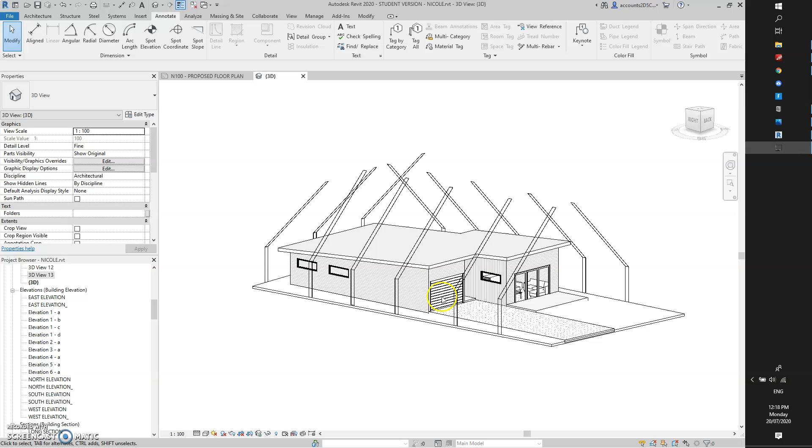Hey Nicole, look, I've just plotted the site, and these are the height to boundary markers which sit on the boundary. I've put a 600 eave on everything.

You could probably reduce it down to 400, but just to show you that we're actually clear all the way around. I've positioned the site as far back as I can.

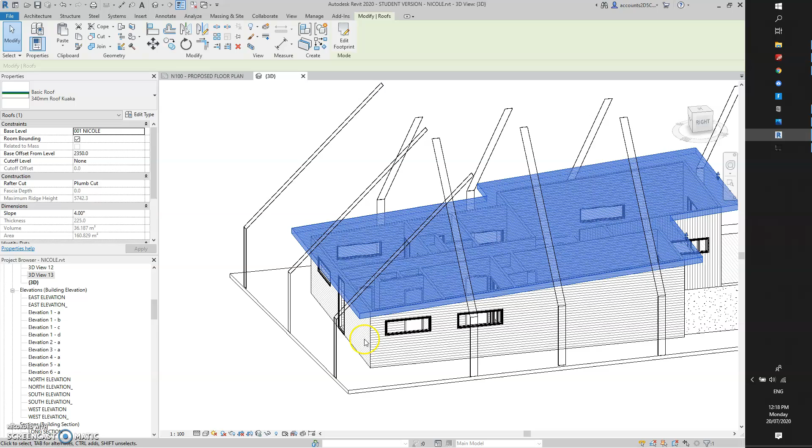I've put a sloped roof on it, so it's going from high to low, which I'll give you an indication of in a moment. I thought weatherboard everywhere, but I thought...

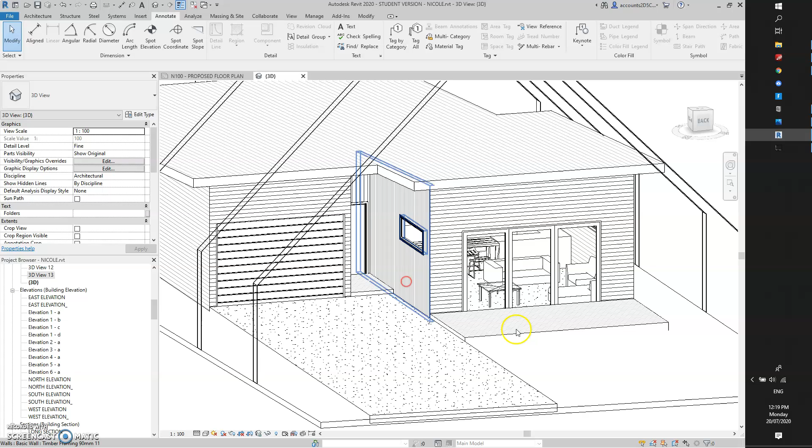What might be quite cool is if you did this entry wall in vertical, just to change it up a bit, maybe even that back wall vertical. It seems to be what a lot of developers are doing, just around that entry.

To keep costs down. Sort of folding doors - let me just correct that - bifold doors onto a deck area with some planting.

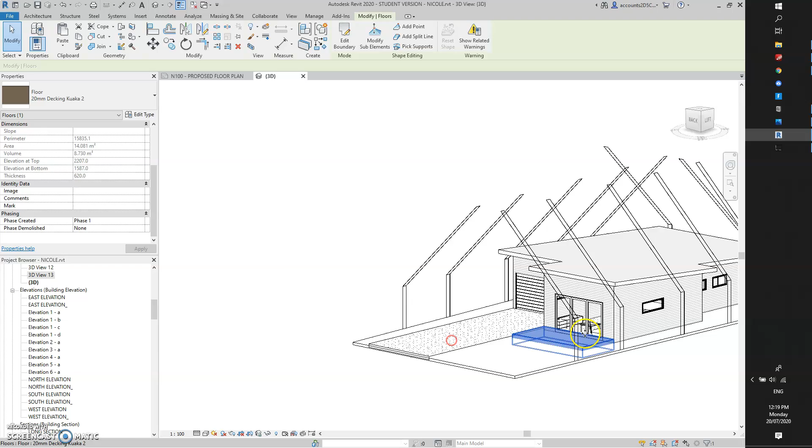Look, I've just chucked in some windows for now, just in terms of the spaces. A full-length ceiling to floor window in the hallway to let light in.

It is the south side, so this roof probably won't. What we may end up doing is from that wall there, sort of this is all sloping, but like I was saying before, this would all still be a truss roof, but flat on the inside.

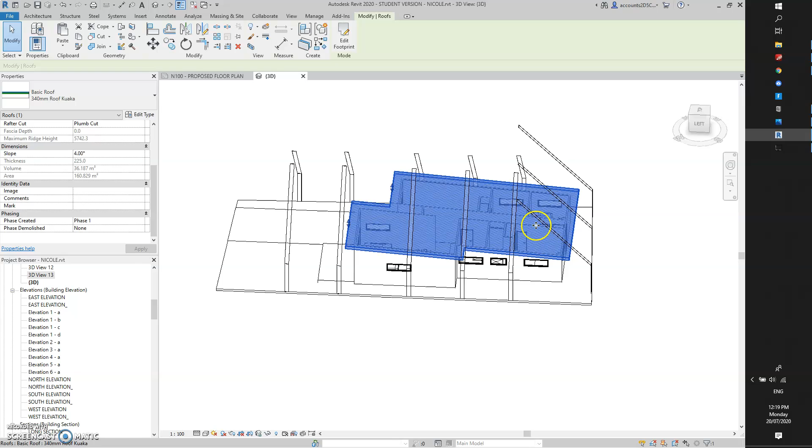So from a footprint side of things, I'll let you have a look at the plan, but basically, yeah, 104 squares is super tight.

We've got this garage, which is a minimum of 6.6 by 3.3, or 3.4 sorry, internal 3.4. You could shrink that down a little bit.

What I normally do is use these guys, A1 Homes, in terms of their garage and their dining and their spaces. You see their bedrooms are pretty small, but I use those spaces.

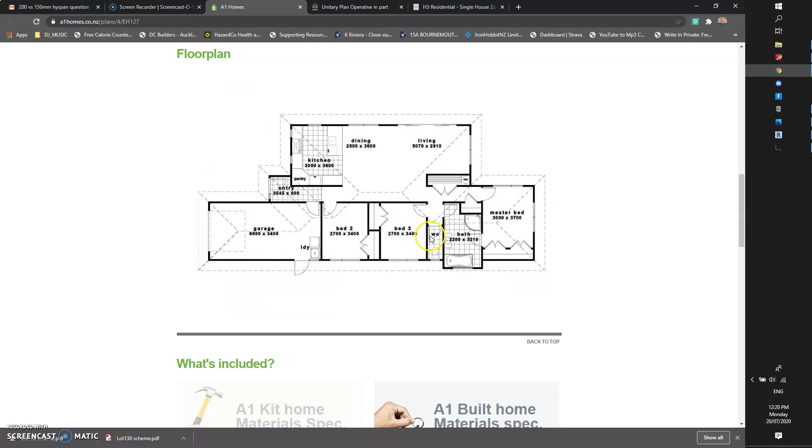So you've got your wardrobe, your laundry, possibly a door out there to the backyard or side yard. Bedroom one's 2,750 by 3.4, so probably okay.

Bedroom 2, 3.4 by 2.8. So yeah, that's kind of it, and then the hallway determining the separation is 1100.

You could go down to a meter if you wanted to, even 900. It just makes the entry feel a bit tight.

And you want some light coming in through there, which is cool. I mean, yeah, you could go down to a meter.

Master bedroom, window on the west and south, a high level window, nice window there for afternoon sun.

Ensuite, I just changed it around to what you had because I put the wardrobe on this side and the ensuite on this side, because what you're trying to do is get maximum window and light coming into the ensuite.

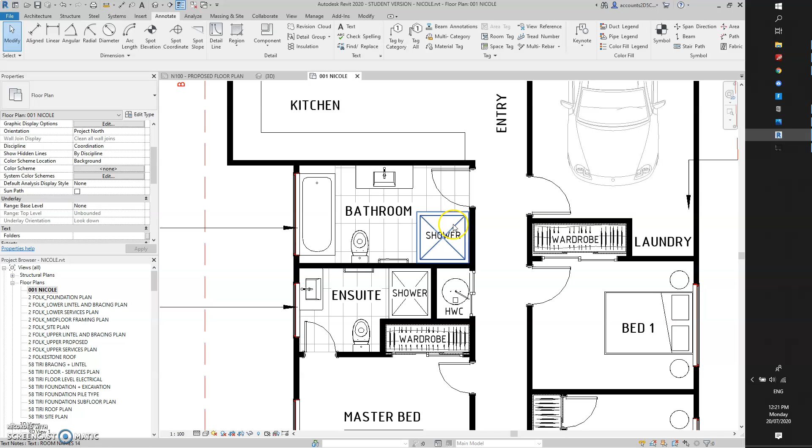You've got the shower, hot water cylinder, the bathroom, sort of the bath there with the big window above, vanity, shower, toilet, which seems to work.

This area here, I know you had it separated, but I'm just thinking in terms of it being three-bed, you probably don't need a massive space.

I think you could get away with kitchen, living, dining all combined. But let me know if you have any other thoughts.

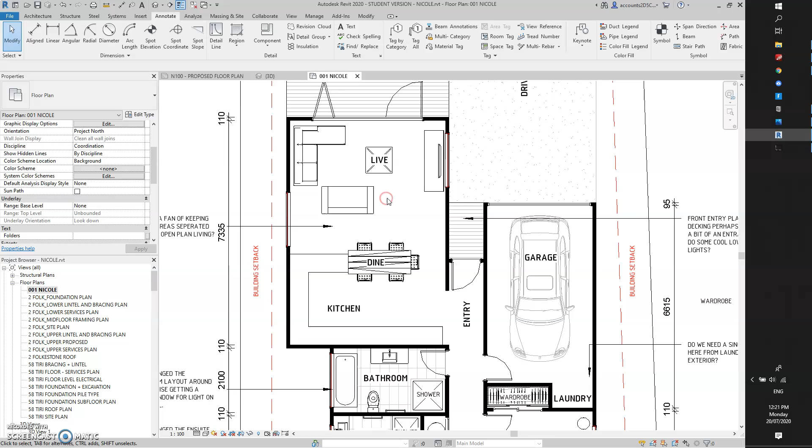This is, at the moment, sitting at 126 squares, which is the maximum allowance for building coverage. So I would say you could probably shrink that down to about 120, but I'd say with a single garage

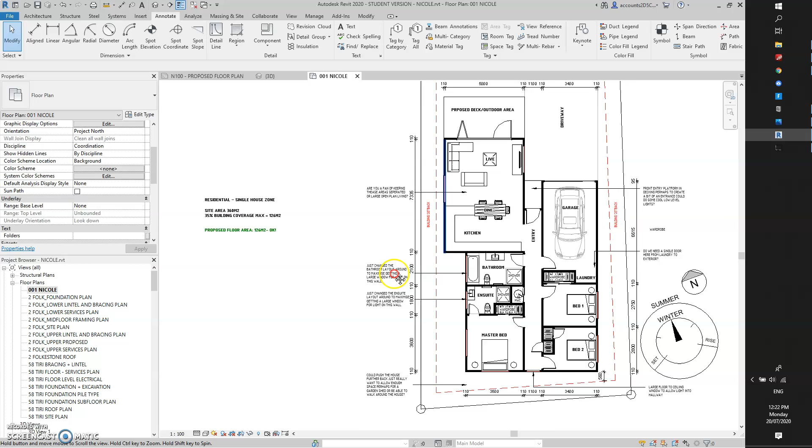and a three-bed, probably wouldn't want to take it underneath 120. But yeah, have a look at what you think and let me know what you're thinking.